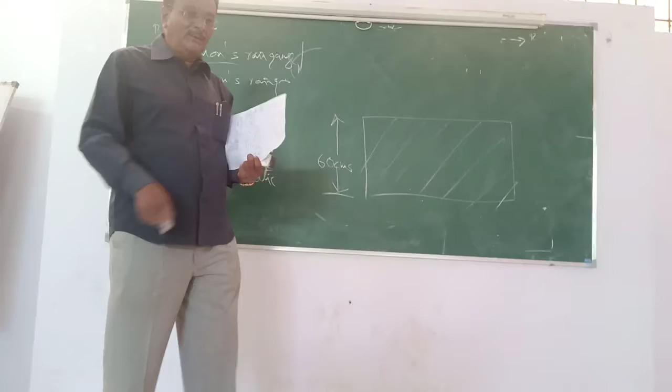There will be a 60 by 60 by 60 centimeter concrete block. The Symons rain gauge is to be inserted into this cement concrete block having dimensions of 60 centimeters by 60 centimeters by 60 centimeters. So this is the very rough dimension.

It consists of the ground level, which I am going to show you. This is a rough sketch, not a neat sketch. The neat sketch is already there in the notes, you can refer to it and read. This looks correct, but it's very rough.

Is it okay? Okay sir. Not okay. Best of luck, very rough. I'm not going to write down the dimensions, so this looks like that. Very rough. Next time.

In this particular setup there will be a glass jar. Can you see? This is the funnel and this is the glass jar.

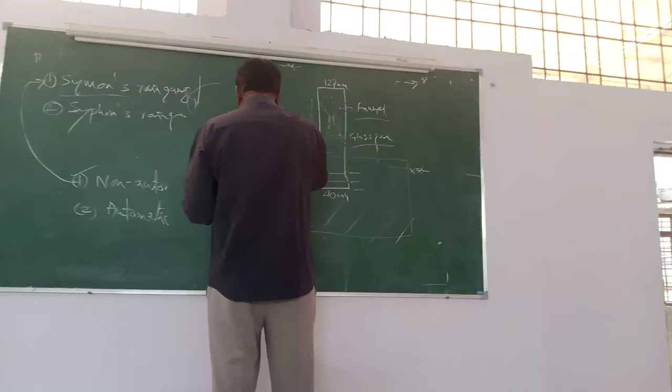The dimensions will be 127 mm and this will be 210 mm. All dimensions are there, I copied them out, and you can copy them out too. The total height from this point to this one will be 203 mm.

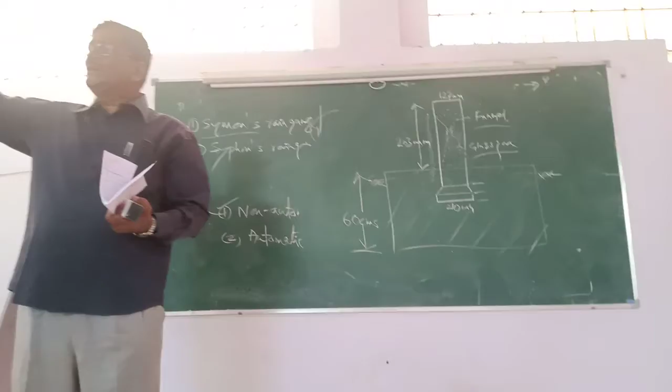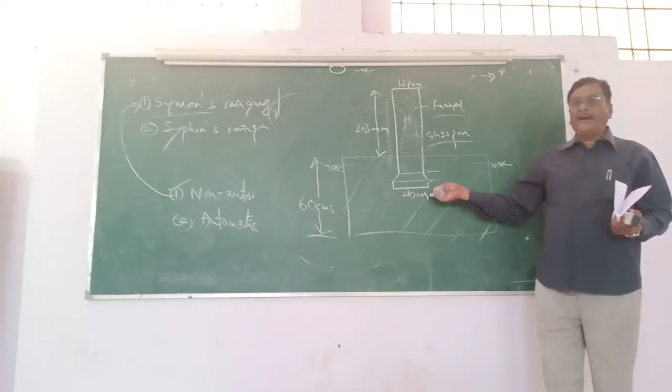Now I have done a rough sketch, just to give the concept of the measurement - you can copy it out. Now, this concrete block is necessary. The concrete block of 60 cm by 60 cm by 60 cm will be prepared on a perfect level surface, and after that the Symons rain gauge will be inserted into the concrete block.

Part of the rain gauge will be below the ground surface, and the remaining part will be above the ground surface.

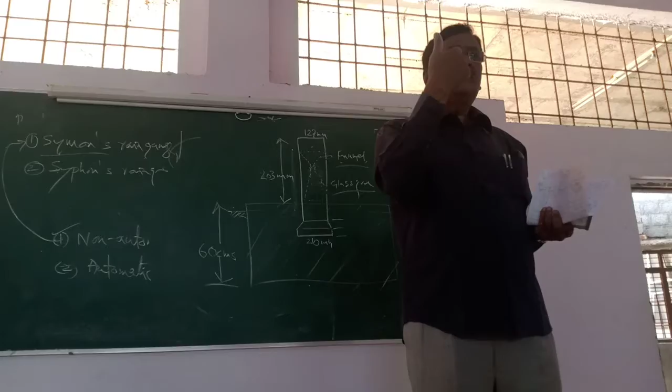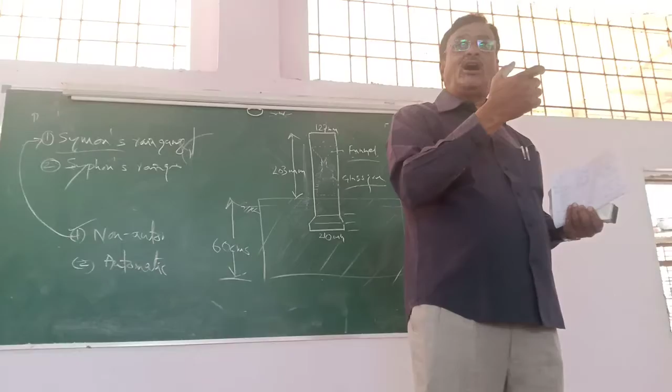Now look at these dimensions - how exactly will the measurement be made? These particular inside dimensions here, the graduations are there for the jar, which reads where the measurement is. It can measure the rainfall of 70 mm, 75 mm up to 100 mm. Right now, that's 7.5 cm to 10 cm. Yes or no?

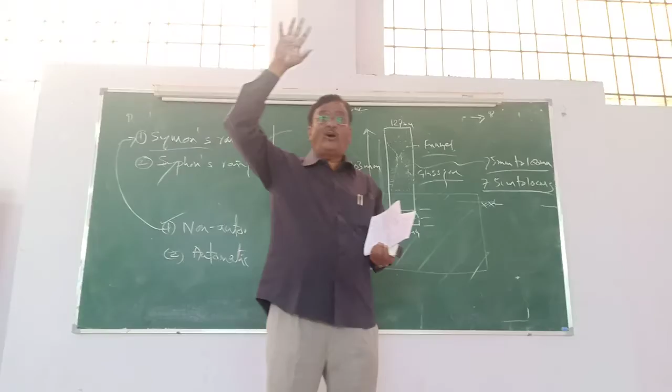If the rainfall is more than 10 cm, I am asking a cross question - then you have to change it. During heavy rainfall, continuous rainfall will be there, so then you have to change it twice. You have to measure it, for example, recording the rain.

Between morning 9 to 12, then again in the afternoon, if the rainfall is heavy and exceeds more than 100 mm, then you simply take out this particular jar, empty it, and fill it again up to the taps. So the Symon's rain gauge measures rainfall up to 75 mm to 100 mm.

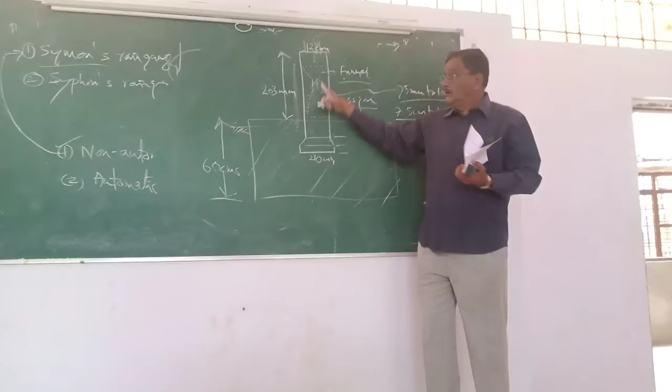Now how exactly do things work? During rainfall, what happens is the water makes its way into the Symon's rain gauge. Correct or not? The water trickles down - the rainwater trickles down through the funnel.

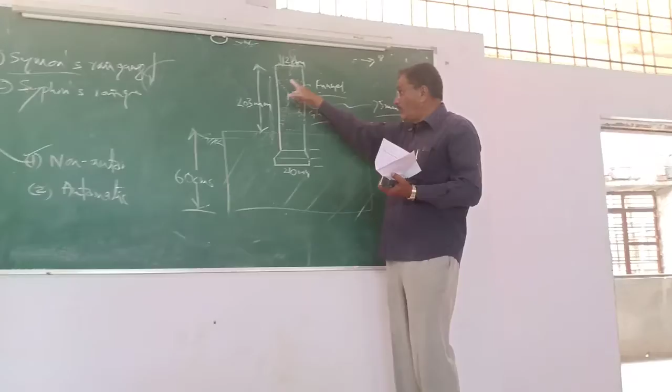First the rainwater falls over the funnel, and from the funnel it enters the graduated glass jar. Then the water is being filled in there. Correct now?

Right, so in Bijapur there was rainfall during the night. Okay, take an example: midnight 12 a.m. to morning 4 a.m. Some rainfall has occurred. In the morning the person will go there, and afterwards the rain stopped. So from midnight 12 a.m. to early morning 4 a.m., that particular period of 4 hours, heavy rainfall has taken place.

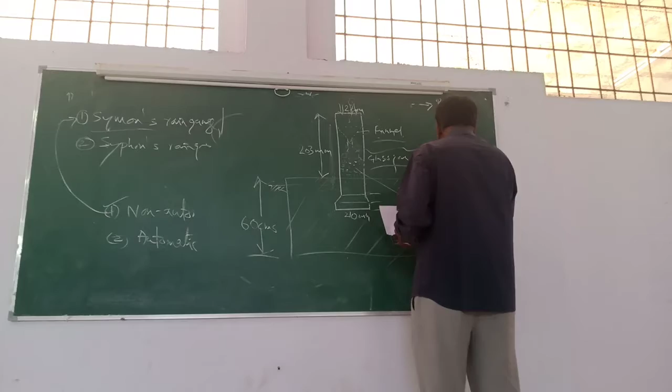Then in the morning the person concerned from the meteorological department will go and check this jar, to see how much water has been collected in it. The measure will be in mm or centimeter, he reads it. Then he may declare there was a rainfall of, for example, 50 mm or 75 mm rainfall.

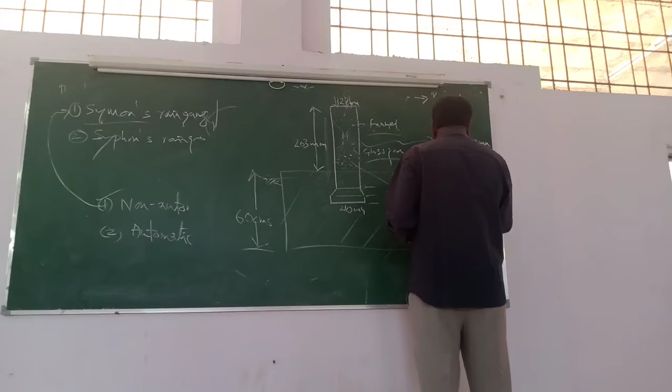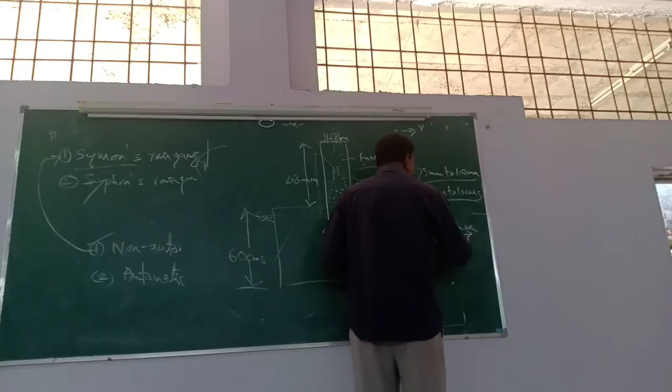If the rainfall is heavy, still heavier, then there may be a rainfall of 100 mm. Then tomorrow morning in the paper it will come: Bijapur received a rainfall of 100 mm. Correct now? Last column there.

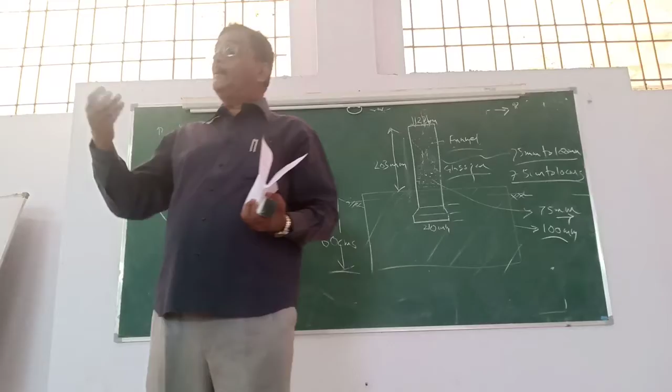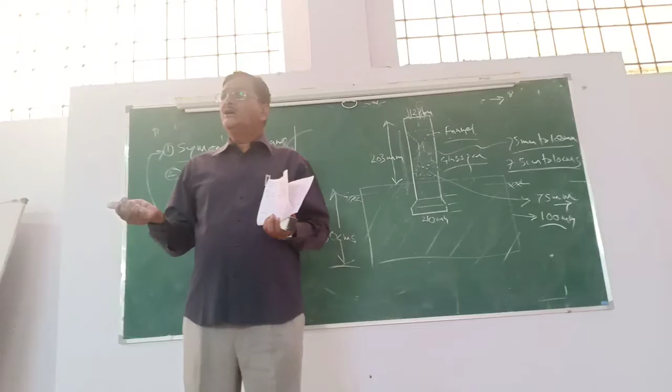Then in Mangalore and other particular areas, there will be heavy rainfall. There they will give 1 hourly rainfall, 2 hourly rainfall, 3 hourly rainfall. Of course that is there. But here, this particular Symon's rain gauge is that non-automatic type of rainfall gauge which has been adopted throughout India. Almost all of the Government of India adopts this, and this non-automatic type consists of all these dimensions that I have written. This is the most appropriate and accurate method of measuring rainfall.

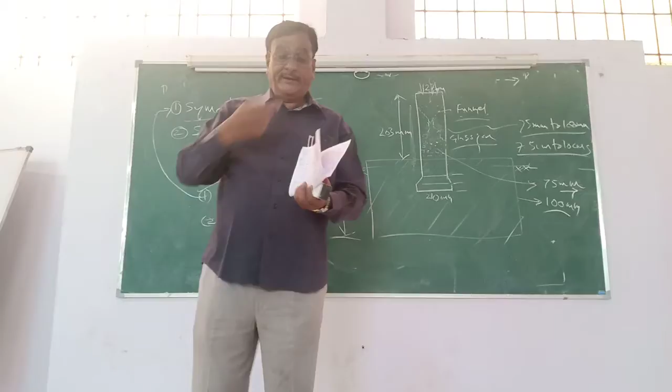Okay, now coming back after this, read again how this works. I already told you, you can take a copy. Now coming back to the next part - what next? Siphon.

Non-automatic type rainfall gauge I have told you about. There is also one more type of rainfall gauge I did not tell you about - that is called the Siphon rainfall gauge. With the non-automatic one, you have to go there, pick up that jar and transfer it into the particular measuring container. You should know how many centimeters, how many mm, is being transferred into the graduated jar - then you will know it. Okay, it shows 3 centimeters of rainfall, 4 centimeters of rainfall, or whatever.

In the second category, automatic type - what is that automatic type? It automatically measures the rainfall. That example is the Siphon type rainfall gauge. It is again simple, let me draw it roughly. Here there is also the tipping bucket type of gauge - that sketch is also there, similar to the non-automatic type. It's in my notes, which you have copied.

Now I am going to tell you: when the rain falls over this particular section of the gauge, it automatically measures it. When the water falls over the jar or measuring jar, then automatically it records on the graph. There is a pen, not this ordinary type, but an automatic type of pen linked to it. When water fills into this one, automatically the pen draws a graph, and then it measures so many centimeters of rainfall. It measures automatically - you only have to go there wherever it is fixed.